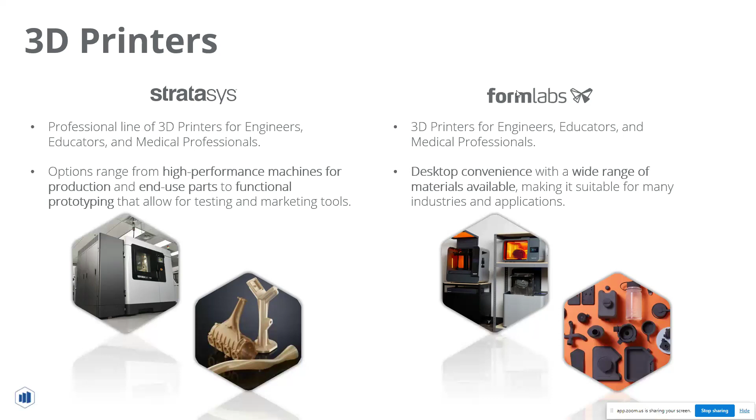And then we help, we print like 100 or 1,000 parts for them. Artec 3D scanners, we sell 3D scanners as well. So on one end, we're 3D printing, and on the other end, we're scanning physical objects in the real world.

Why would you want a 3D scan? Well, maybe you want to reverse engineer a part that you don't have a drawing for. Or maybe you want to inspect a part, to see if it's within the tolerances that the design intent or the design engineer intended.

So we have a few different scanners. We have the Artec 3D Leo, which is a lightweight and mobile scanner. You can use it anywhere. It has a hard drive and a battery built in. It stores the scan data inside, and then you can plug it into a computer and retrieve the scan data, work with it to reverse engineer the features, and then get it into SOLIDWORKS, where you can work with that model and change it, modify it, or 3D print it, whatever you want to do from there.

Then we have the GOM scanner, which are industrial 3D metrology scanners. That means they're very precise and they're used for inspection. So 3D scanners and 3D printers and software, we sell a lot of different things.

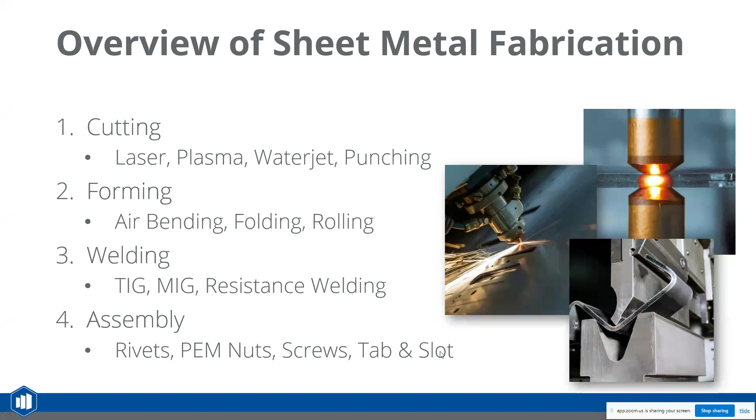So my personal experience, my background was as a product designer or mechanical designer. I worked in the sheet metal industry, and I primarily use two machines. One of them is on the left here, is a laser. It's the Mazak laser from Japan.

And then we have the Safan Darley press brake. This one is for the air bending of sheet metal components. These are the two machines that I mainly designed for and made CNC programs for. So I can speak to the background of these machines and the projects I've worked with and designed for.

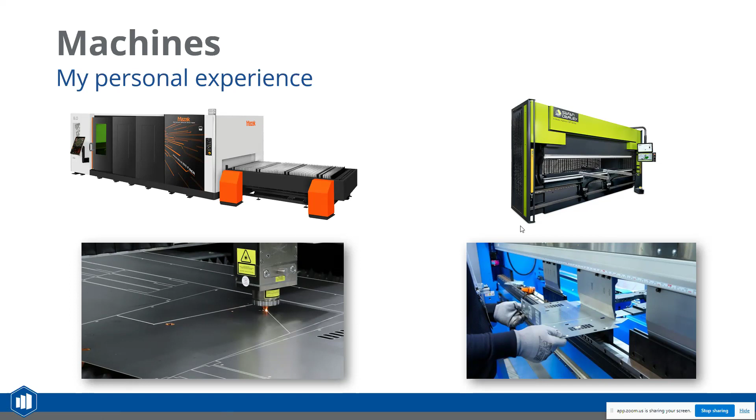Traditionally, when you think of sheet metal design, when I joined my previous company, most of our drawings were in 2D CAD. There was a 2D CAD file with the formed sheet metal and the flat pattern on the same drawing, and those two were disconnected.

They weren't parametric in any way. If I added a hole in the formed part, I would have to add it on each view and then also on the flat pattern.

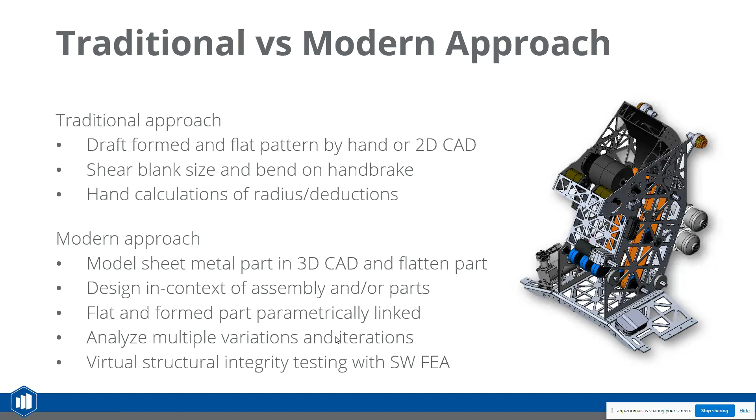So SOLIDWORKS and sheet metal design, what are the benefits? SOLIDWORKS has specialized tools for sheet metal design. We're going to see those in just a second. Flanges and bend deductions are done automatically.

Flat patterns, we can create those automatically. We can generate DXFs directly from the 3D model, a flat DXF. Those are the most useful for the cutting operation.

So that's nesting. We can also export our models to a CNC bending software. For the machine that I use, Safan, I would export the 3D model, and its software would recognize the bends, and then I could create the program for bending.

I could design the bending operation: this bend first, then this second, then this third bend. I could see where the tools on the machine would be, so every time I'm bending each bend, I can see whether or not my part is going to hit the tools or the machine, or if I need to make changes to accommodate the machine and tools that I'm using, because I want to be designing for the machine that I have.

Now, the benefits of sheet metal design in SolidWorks. Why would you want to design in 3D? Again, it's accuracy. We can create accurate parts. We can minimize the prototyping because we know how the part's going to look before we even design it.

We can optimize the material usage and reduce waste because we're going to be nesting, programming a bunch of different parts at the same time, which reduces material usage. We can simplify the CNC programming; it's very easy, you just drag and drop into your nesting software, and everything gets programmed pretty much automatically. Because of this, it's much faster to go from the design phase into the production phase.

Okay, so now that we've covered a little bit about Trimech and manufacturing processes in sheet metal, let's actually jump into SolidWorks and show you how to use the features to design this shelf. So this is a sheet metal shelf with a few different bends. It has holes, it has hemming, and I'll show you how that's done.

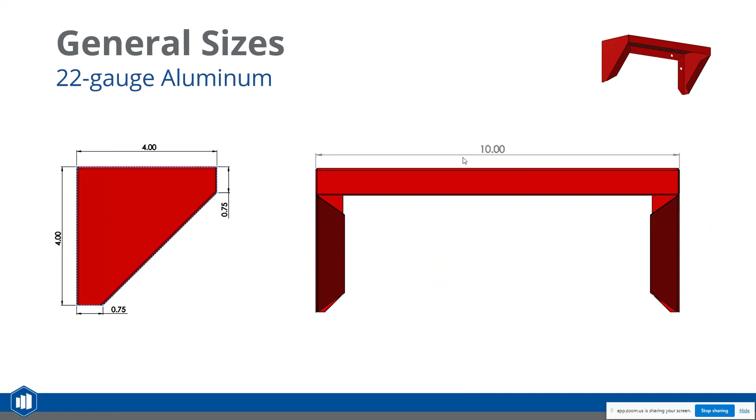This is the general size, and this is in inches, guys. So 10 inches is going to be about 25 centimeters. That's how wide this shelf is. It's going to be 22 gauge aluminum, so very thin. It's thin aluminum that we're going to be using.

We're going to be covering a few different sheet metal features that you can see here. I think the most important in the end is to get the flat pattern - that's ultimately the goal. Because this part is symmetrical, we're going to design one side of the part, and then mirror it over to leverage that symmetry.

And the process that we're going to use today is called convert to sheet metal. So I have a question - yes, go ahead. Sorry to disrupt, but I wanted to know, what do you mean by nesting?

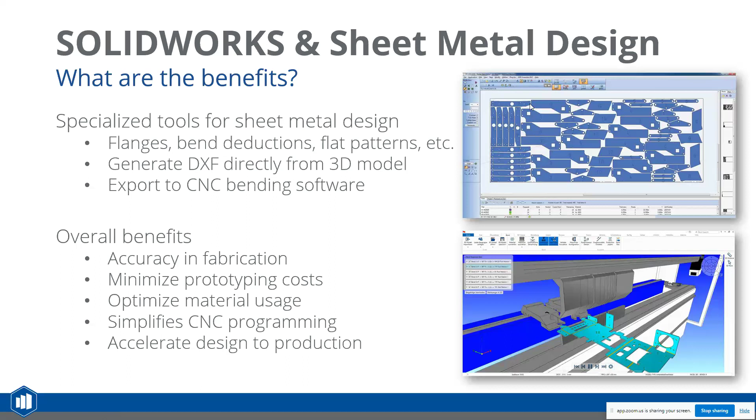And then you can say if your group of DXFs is a specific product and your purchase order is for 100, you can put a quantity of 100 and it'll multiply everything by 100. Okay, yeah, thank you. No worries, thanks for the question. Good question.

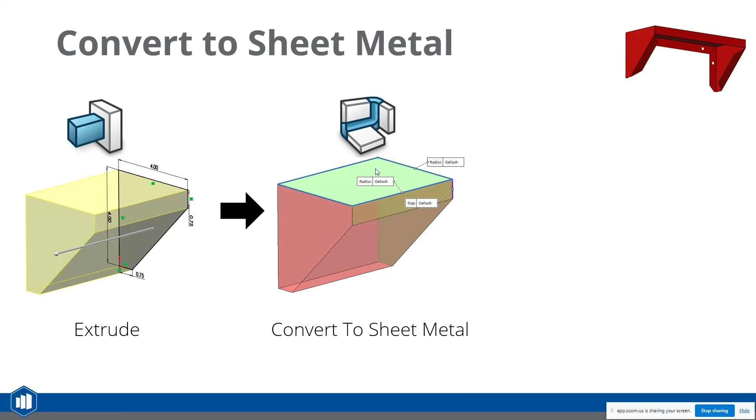So back to the sheet metal design, we're going to use convert to sheet metal today. That's one of the ways you can design sheet metal in SolidWorks. It starts off by creating a solid body - we're just going to extrude the sketch, and then use the convert to sheet metal feature, which allows us to pick faces and edges to define the sheet metal part. So we're going to end up with the sheet metal body on the right from an extrude, which is very useful. There's a time and place to use this feature, and today is a good example.

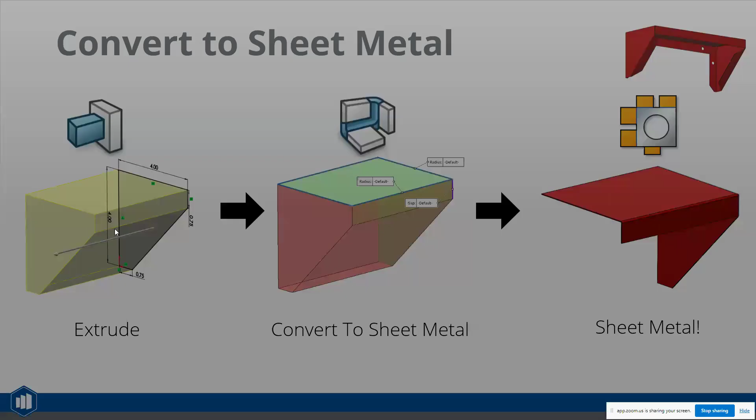So let's jump into SolidWorks.

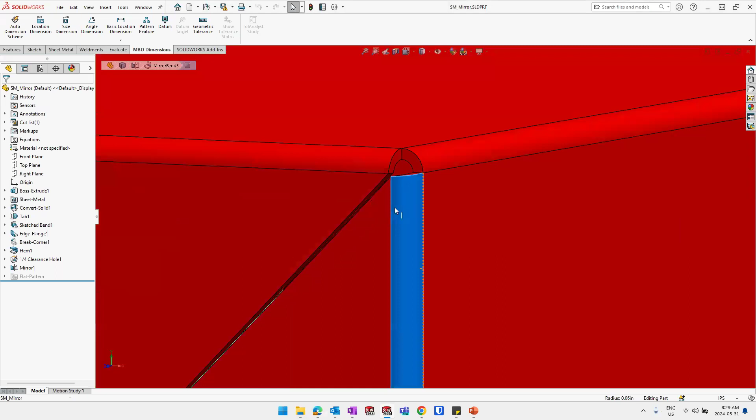Here is the finished part. We can see the sheet metal part here. You can see that SolidWorks has applied the different radii, so we have the radius here, and we have a gap. This would be very difficult to do without sheet metal features. You'd have to use surfacing, and it would take a long time.

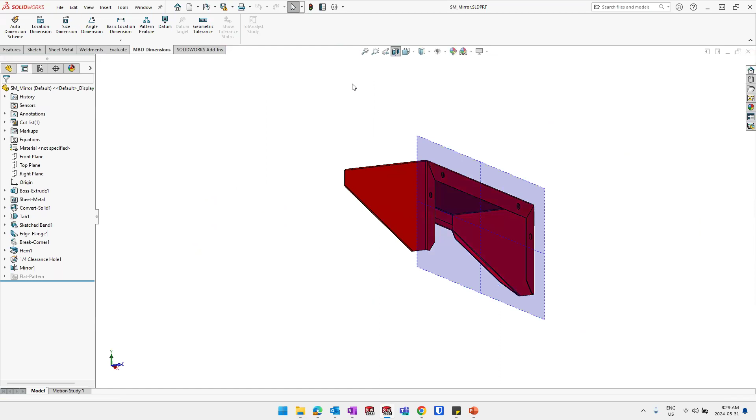You also have the hemming, the hem right here. You see the hem? The material is folded in on itself to create a stronger edge, so you have double the thickness in this area. This is a common process as well.

So the sheet metal tab is going to be here in SolidWorks. If you don't see it, you can right click here and find sheet metal, and you're going to see all of these different sheet metal tools. One of them is the flat pattern.

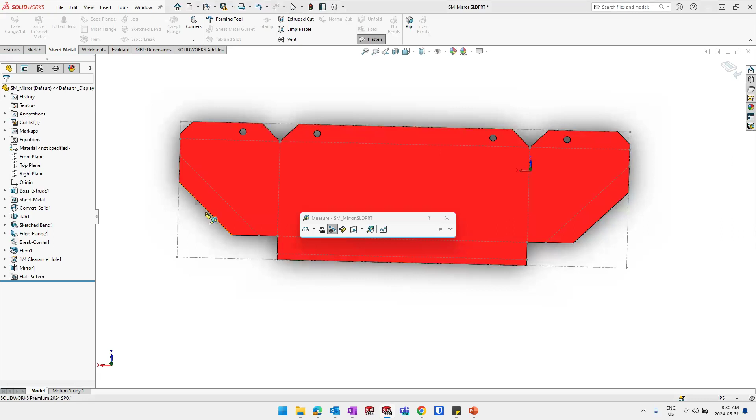This is just a different configuration of the part. One of them is the flat pattern, and we can toggle that just with the click of a button, and we have this flat sheet metal part. We can then measure the bounding box: 5.6, 11, or 17.9.

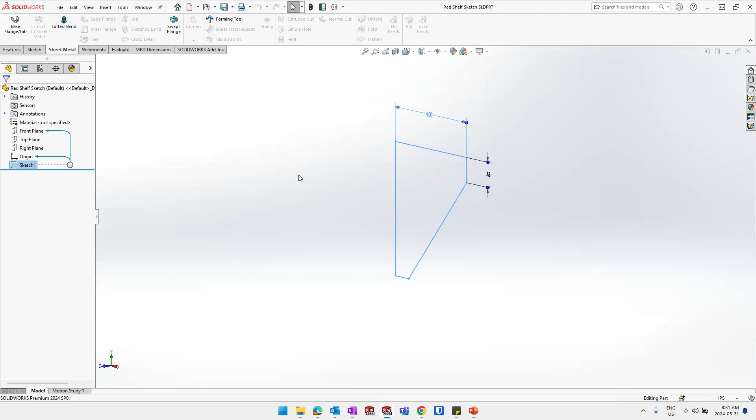So let's close this and let's start designing. Here's my sketch, and I'm going to extrude this sketch. Feel free to stop me whenever. I'm just going to do a simple extrude of 5 here. Okay, and we have a solid body.

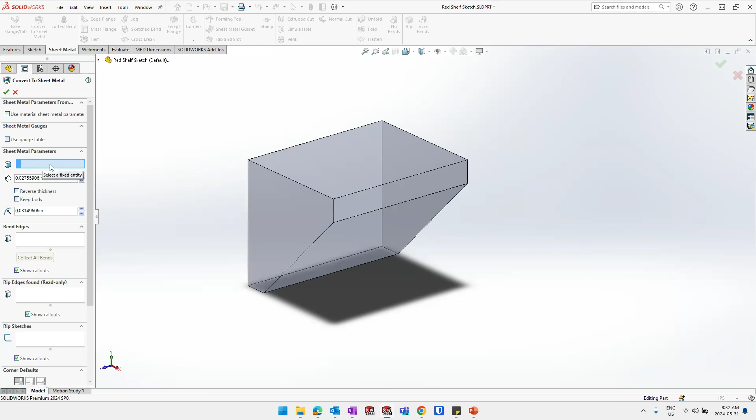Now, convert to sheet metal is the feature we're going to use. You can see the picture here - it's going to create a sheet metal body from a solid body. So let's see how that works. The first thing is a selection of a fixed entity, so it's looking for a face. We want to say that this face is our fixed face.

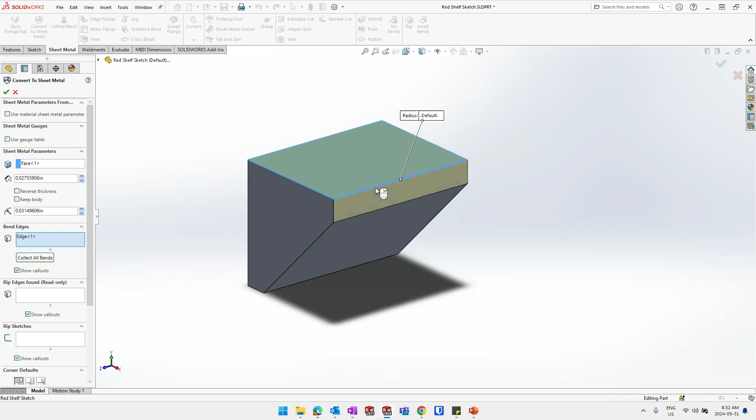And then what are the bend edges? You can do collect all bends, but we don't want to do that. We want to have some more control, so we're going to click this guy here and this guy here.

And we're going to use a gauge table, which is just a table of different thicknesses, so we can pick from different thicknesses. We're using 22 gauge today, so we're going to select 22 gauge, and we can start seeing that things are happening here.

The other thing that we want to control is the gap. This is the default gap for all gaps in our model here, so we're going to do 0.01. This isn't like an industry standard or anything like that, it's just what I'm doing right now. But you'd have to know what you can do in your manufacturing shop. I've done 0.5 before, I've done 0.1.

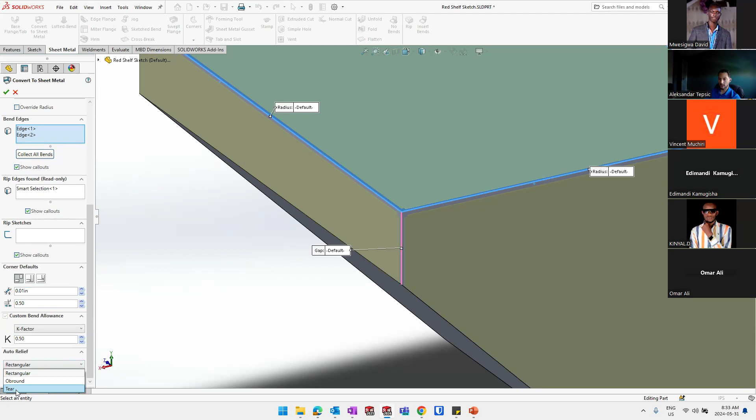So it really depends. We're going to do auto relief tear - I'm going to show you what that means in just a second, but for now let's do that. And we can also change the thickness, reverse. We can go on the outside of the sheet metal face, or we can say that the faces of the body are going to be flush to our sheet metal.

And then we can also choose the different radius of the sheet metal component. This is dictated by the tools that you're using to bend. So in my previous job, I knew for this thickness of material, I only have, for example, 2 different tools, and I know they can make these 2 radii, because I would bend it and measure it, and I would input that in here. So we're going to just go with 0.03.

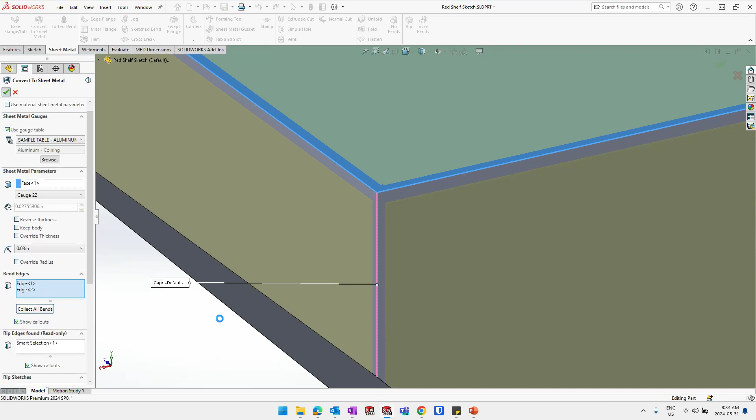We're going to click OK, and we've created our sheet metal body, which we can now flatten. So we can flatten it, but we're not done, so we're going to continue on here.

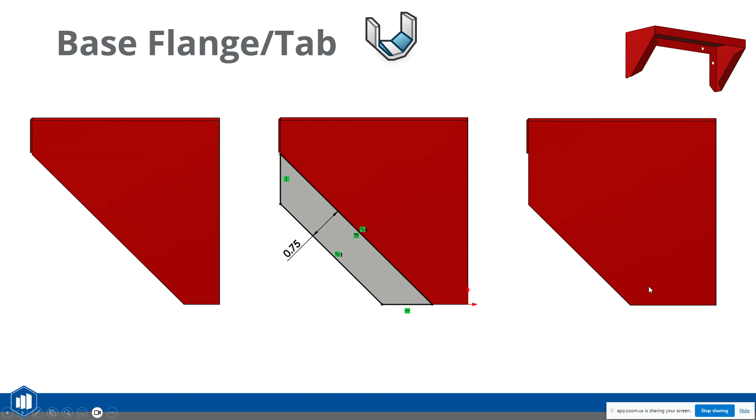Okay, so next we are going to add some material. That's a very common thing - we want to extend something, we want to add material in a certain area, and we can definitely do that. So you can see here, we're going from this to this. And then when we add that material, we're going to use something called the sketch bend - we're going to bend the sheet metal about a sketch line. So let's do that.

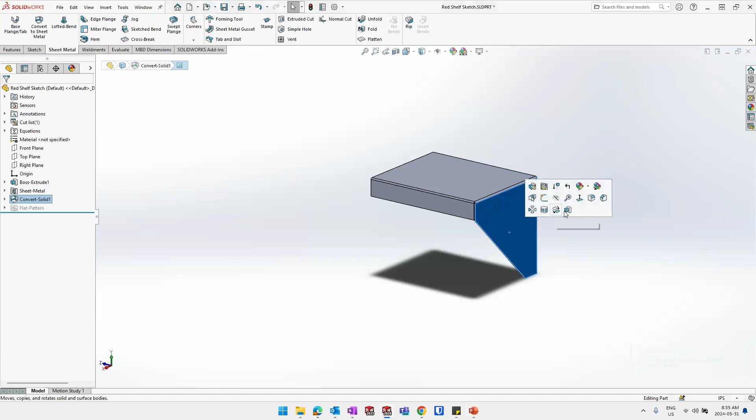Okay, I'm just going to do normal to. I'm going to sketch, and I'm going to use the S key to pull up my line tool.

So we have a closed sketch here, and we just need to define some dimensions. First, this line and this line, we need to make them parallel. And then we need to create this dimension. It's going to be 0.75 inches, so around 2 centimeters, for example. Once that's done, we can click OK.

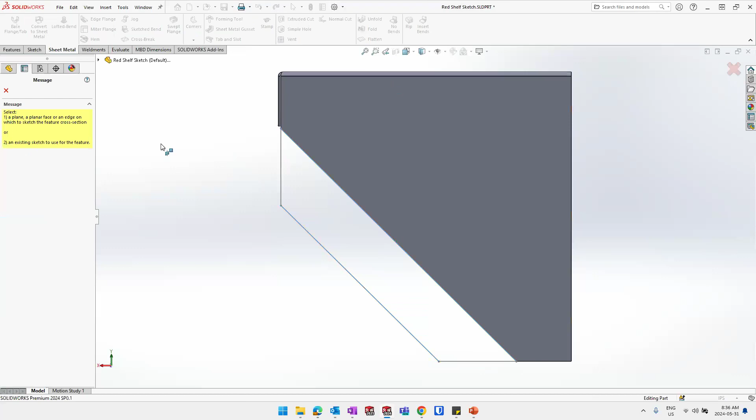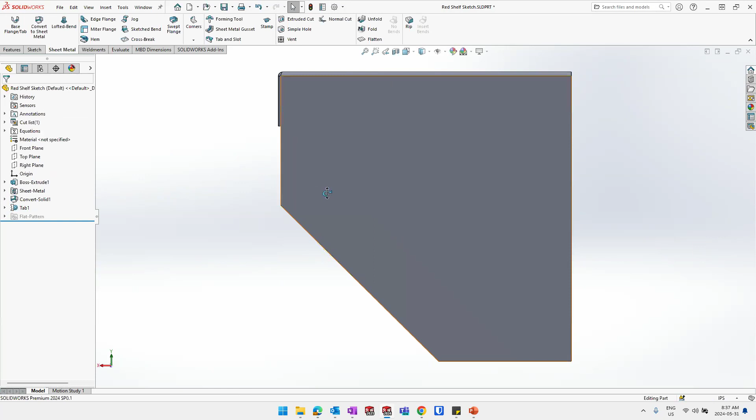Then base flange or tab, that's the feature we want to use. So if we click base flange or tab, click the sketch, it knows that we're adding to an existing sheet metal body. So it's filling this information for us, like the gauge and thickness. And we're going to merge that result. Once we click OK, we don't see any edges here because it's merged those two bodies.

And that feature is now in our tree here, right? We can always go back to it. Just going to turn this off. So our feature is here, right? Now...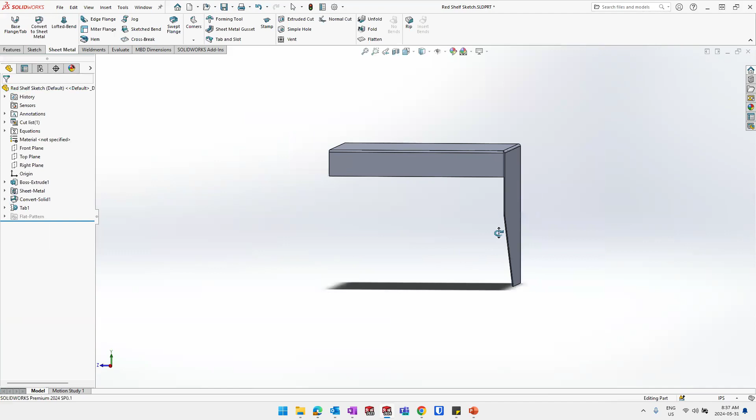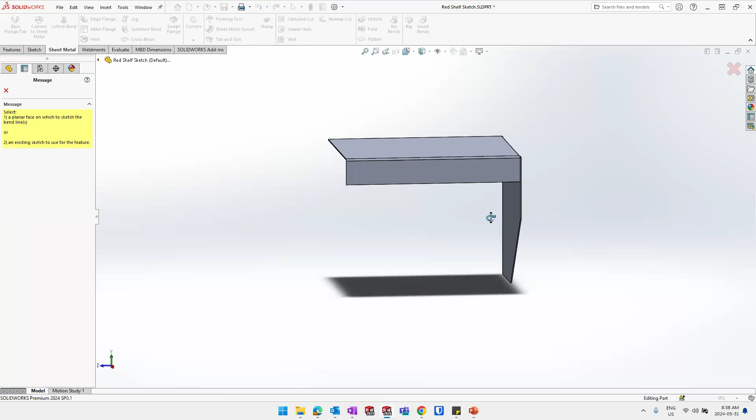We want to make that bend here. So first we need to activate the sketched bend feature. So sketch bend, and it's asking us to create a sketch or use an existing sketch. So we're going to say this face here, and then we can just stay in this view, select the line, draw the line. Again, we're going to say it's parallel.

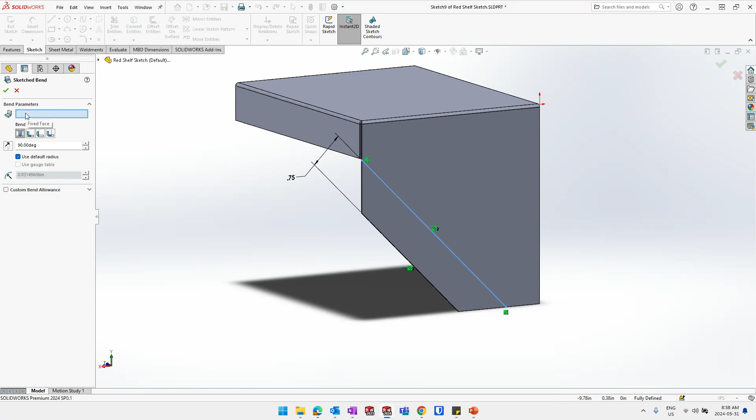Make parallel. And again, we're going to do 0.75. We're going to click OK. And now we're right away in the sketch bend feature. And we need to select a fixed face, so which face is not being bent, basically.

So this guy here. And then we can see a preview. It's bending the wrong way, but that's fine, we can just click reverse. We can specify some different options here, like are we bending on the center line of that line, or are we bending material inside or material outside, or do we want that bend to start where the radius starts? But what's the angle? Are we using a default radius, etc., etc.?

So there's some options here. So let's confirm that. Well, 90.

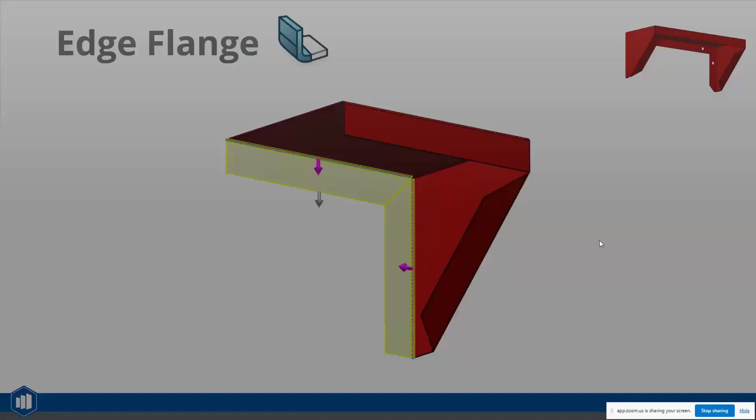Any questions so far? Okay, let me know if I'm going too fast, too slow. This is for you guys.

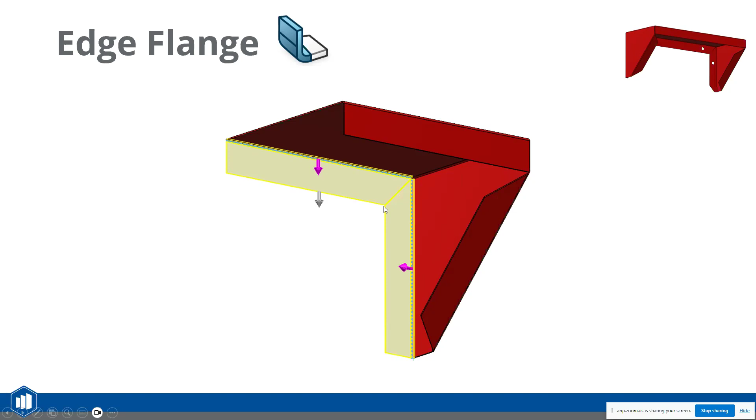So the next step is to add the flanges on the back here, right? And the interesting part of it is how do we get this? How do we get the two bends to meet at a specific angle, right? So let's see how that's done.

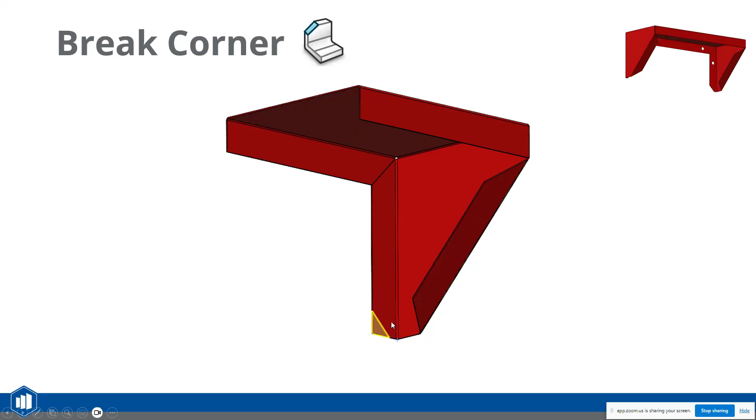And then we're also going to use break corner. I've used these in my previous job to remove the sharp corners, just because I didn't want people to cut themselves in production, or the customer to cut themselves. So I would round the corner, or I would just chop it off at a 45-degree, just like this. And then we're going to do the hem operation as well. I'll show you how that's done.

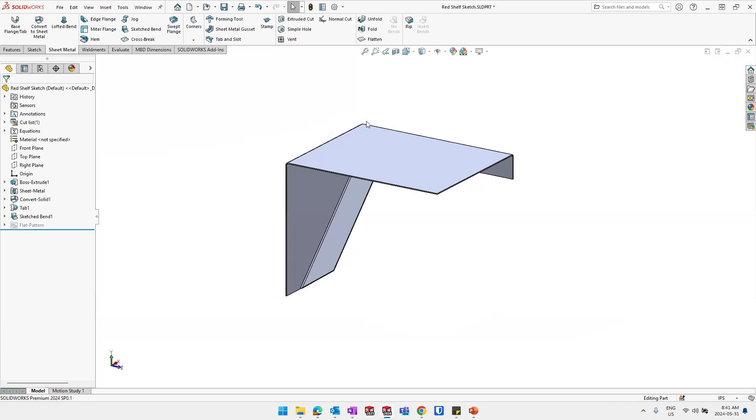Okay, edge flange. I like this being white, you don't need a shadow. Okay, edge flange.

We're going to click an edge, and you can drag this flange, or you can input a specific length here. I believe we're going to input 0.75 again. 0.75.

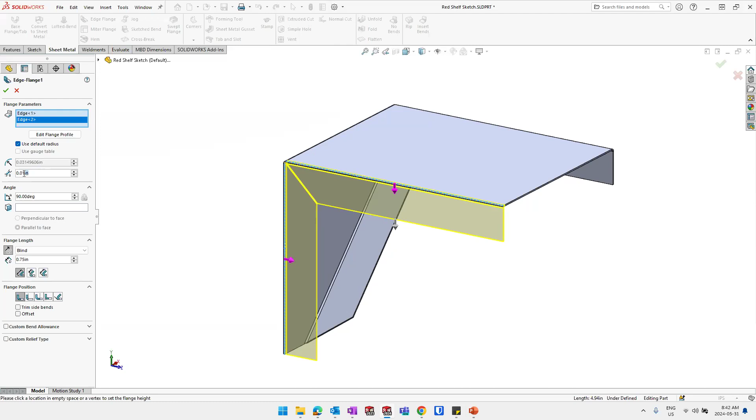But how do we get the second edge? Well, we can just click here again and select the second edge, and SOLIDWORKS is automatically going to put the cut here. We don't have to do any trimming, it's going to do that for us, right? We can choose the gap distance, that's the gap distance between these two guys right here.

So if I go 0.2, you can see it's much more. 0.1, 0.01 is what I'm going to do. Angle, flange length, it's blind, but you can do up to vertex. So if you are modeling and you have a vertex that you want to go up to, you can choose that instead of a fixed distance.

These options down here are different ways of defining the flange length. Typically, outer virtual sharp is the one to go with, because that's the one that you can measure, like with a tape measure or with a caliper. So this one always made the most sense to me, but I'm sure there's applications for these guys as well.

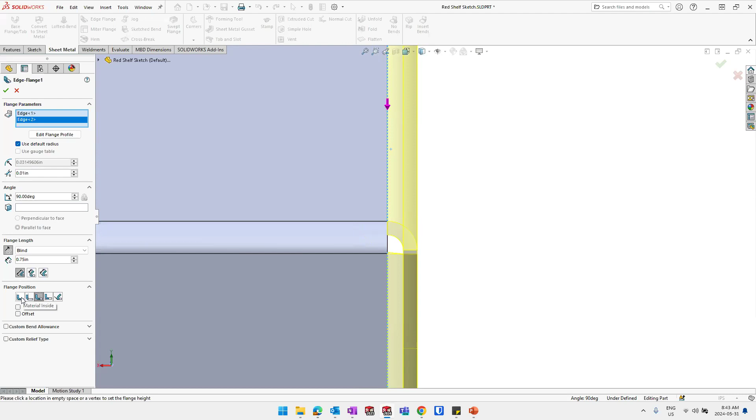Flange position. So if I go to this view, material inside means that the flange face is going to finish where this edge is. But if I go bend outside, you see what's happening to the flange? It's coming out from that edge. So depending on your design intent, you want to make sure that you choose the correct flange position. Most of the time I did material inside, just because I knew where my flange face would end, right? Any questions on the flange properties? Or does that make sense so far?

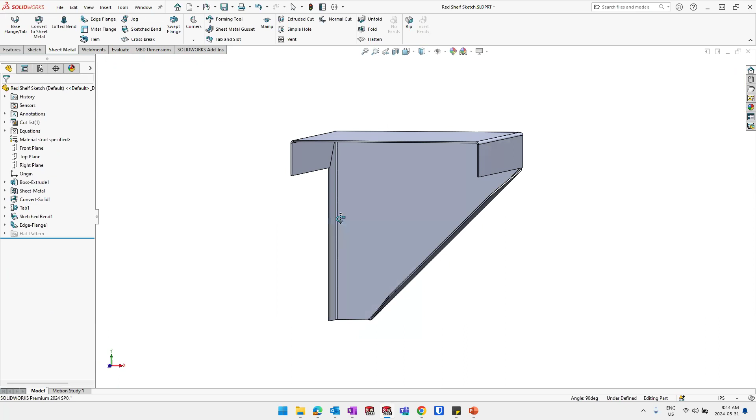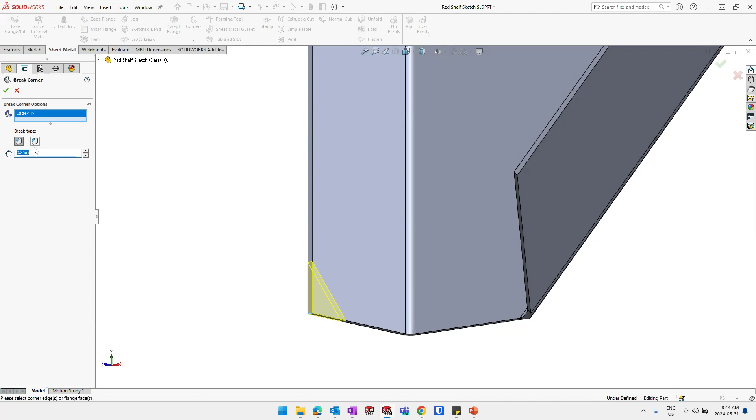So let's break the corner. Break corner is a simple feature. You can either do a chamfer or a radius, and all we need is an edge. So we remove that sharp corner.

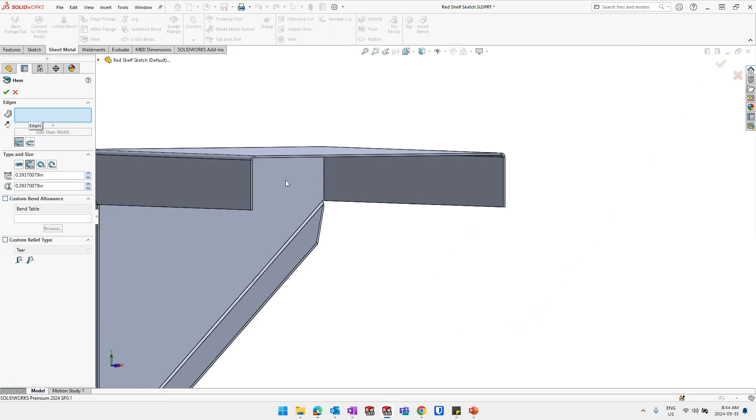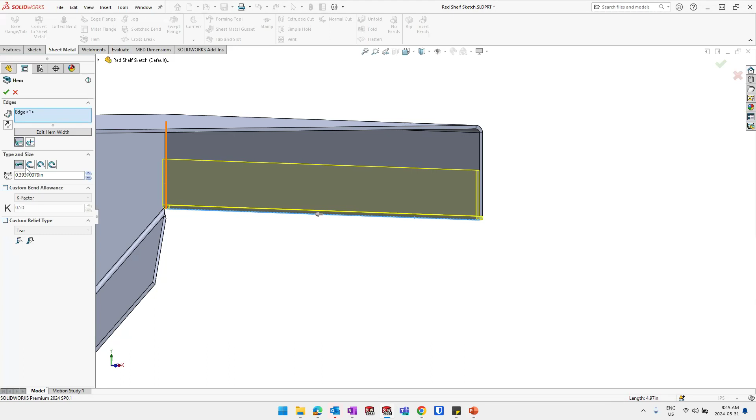Hemming. For hem, we need an edge. There's different types of hems, depending on the machine that you have. A lot of these options are machine dependent. But I've used the closed hem, which basically crushes the sheet metal into two layers with pretty much no gap in between, right? That's what we want. We're going to do 0.25.

Okay, so we're getting there, and we're showing you guys a bunch of different features. The tear, right? So what's happening here, this might look a little bit weird. In the real world it's not going to look like this, but the material is going to want to tear because of that bending operation. This radius here and this radius here, there's going to be some material that's kind of deforming plastically in that region.

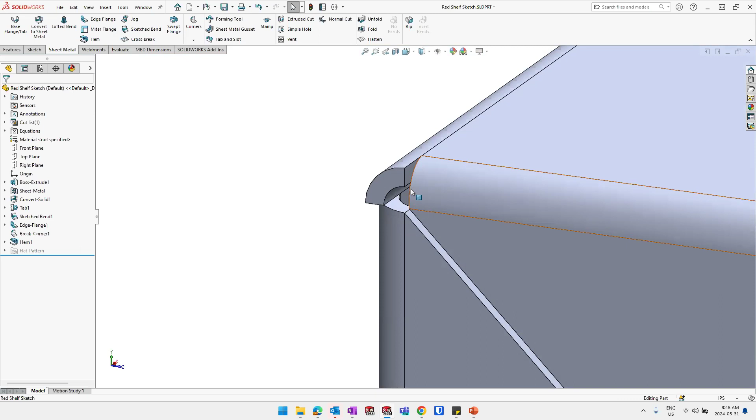You could, if you wanted to get rid of this, add a corner relief - this is not part of the presentation, but I'm going to show you what that means in just a second. So we're going to get corner relief on a three bend corner, and that's this guy here.

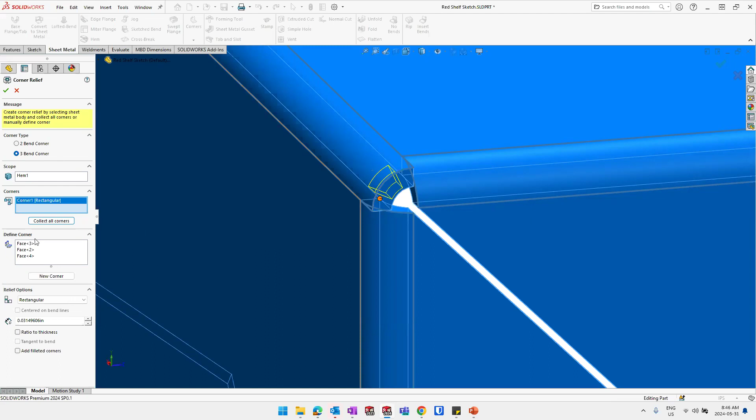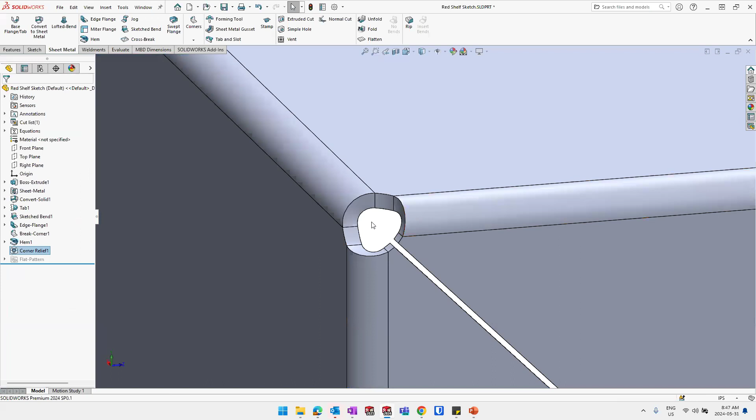And we can change the way this looks here, right? So we can add a relief in this area so that there's no deformation of material in the corner. So typically this is a good practice unless you want the corner to be closed.

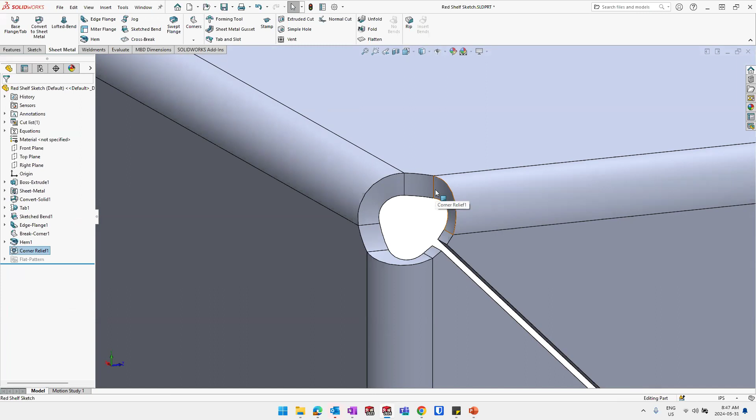I designed sheet metal enclosures where there was airflow going through, and so the corners needed to be tight to reduce the losses of pressure. So, but typically, if it's a structural component like this shelf, maybe you might want to put a relief in there, just like that. Any questions so far?

Okay, next we're going to use the hole wizard to define some holes. And then we're going to mirror that body to leverage the symmetry. Okay, hole wizard.

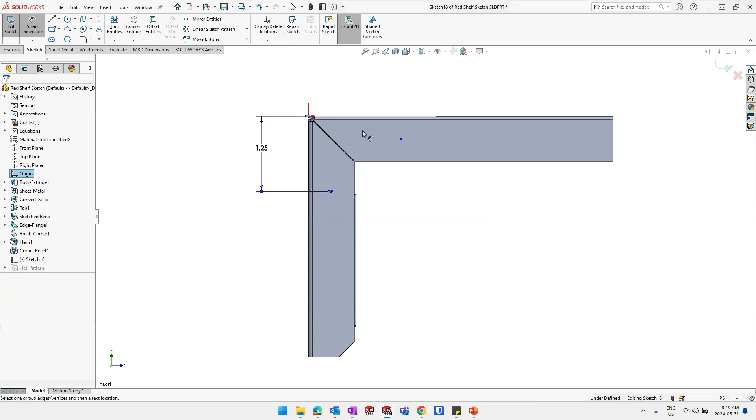Sorry, is there a question coming through? Because the audio is choppy. I'm struggling to hear the question.

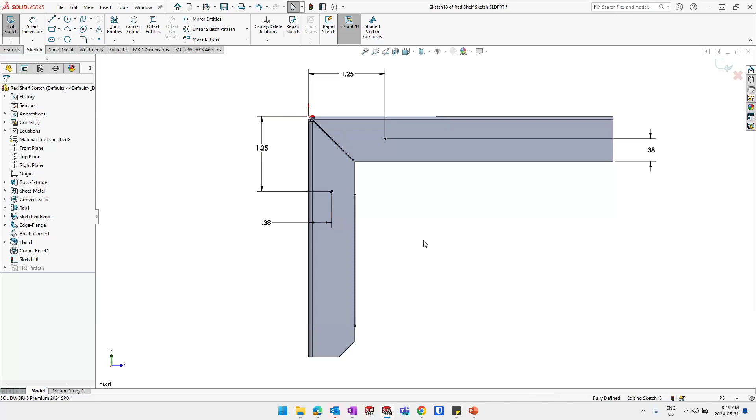So I've defined two points here where I'm going to add the hole using the hole wizard. And so I just input 0.75 divided by 2. We let SOLIDWORKS do the math, less work for us. So this is just right in the middle of that flange. We're going to add the two points.

And so now if we go, we have to exit sketch, hole wizard. I don't know if you guys have ever used the hole wizard. If you use it, that's great. If you don't use it, this is basically your machinist's handbook in SOLIDWORKS. So you can define the type of hole. Today we're going to use just a straight basic hole. You could do that with a cut extrude, but there are some benefits to using the hole wizard.

Like having access to different standards - inch, metric. I'm not sure what you guys use in Uganda, but you can pick a standard and then select what type of hole it is. So in our case, it's a screw clearance hole. And then we can just say 1/4 of an inch is the nominal size. And we can tell it whether that's a close, a normal, or a loose fit.

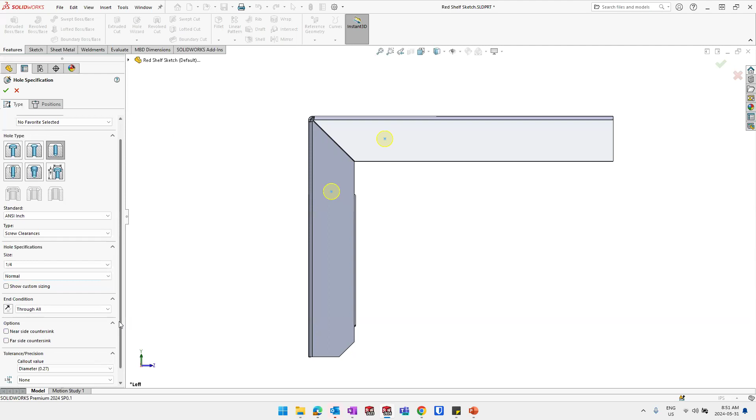And then it's going to size that hole based on these options. So we're going to say normal. End condition is through all. We can add countersinks near or far, etc. And then SOLIDWORKS picked up that sketch, so the points are already there.

The cool thing is that in the feature tree, you can see '1/4 inch clearance hole.' If you just did a cut extrude, it would just say cut extrude 5, which doesn't really give us much information at a glance when somebody's looking at this.

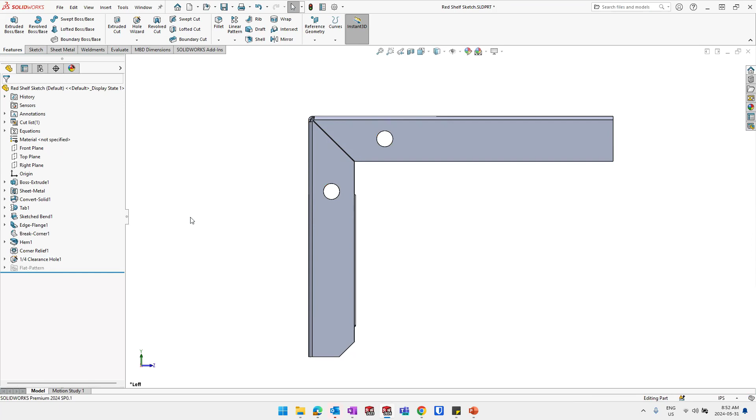It's much easier to understand what that is. And when you measure this hole, you're going to see 0.27. So 1/4 inch is 0.25, but because we said it's a screw clearance hole with a normal fit, SOLIDWORKS is adding the 0.02 for clearance on its own, using that from its database, which is why I say it's like a machinist's handbook.

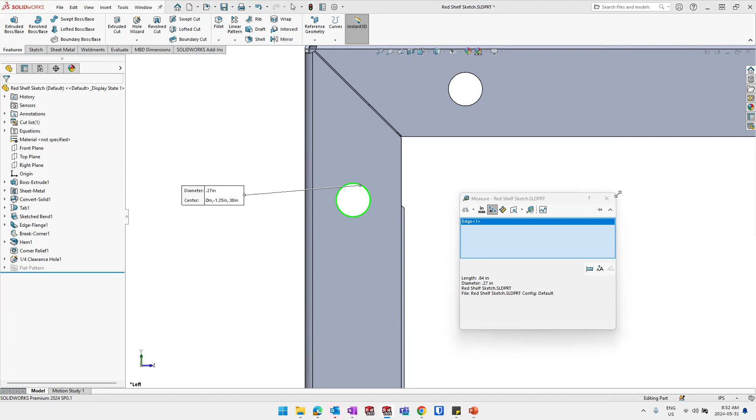So if you're not using that, I highly recommend it. Actually, we don't want to go through all — we want to go back here. That's funny, we don't want to do through all, we want to go up to next.

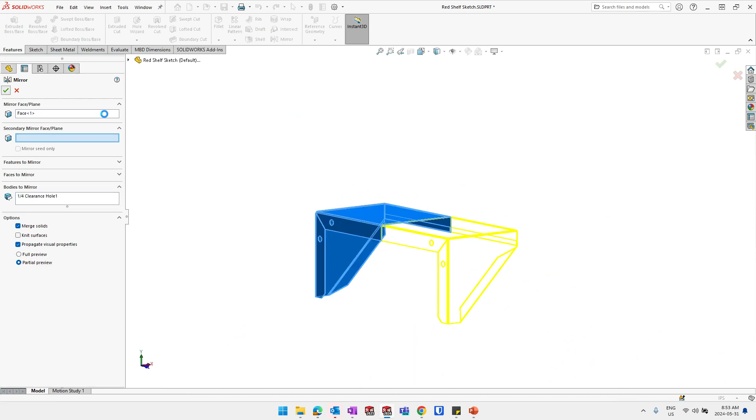And mirror bodies — we're going to use mirror bodies to mirror this body. We're going to select the mirror face, this face here, right? And there you go, the sheet metal component is done.

We can flatten it, right? We can create a drawing of this. So let's create a drawing.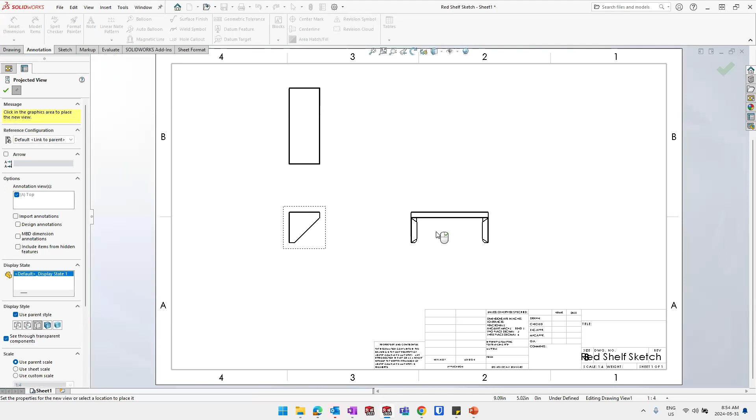Trying to change the scale. Okay, there we go. So there's our drawing.

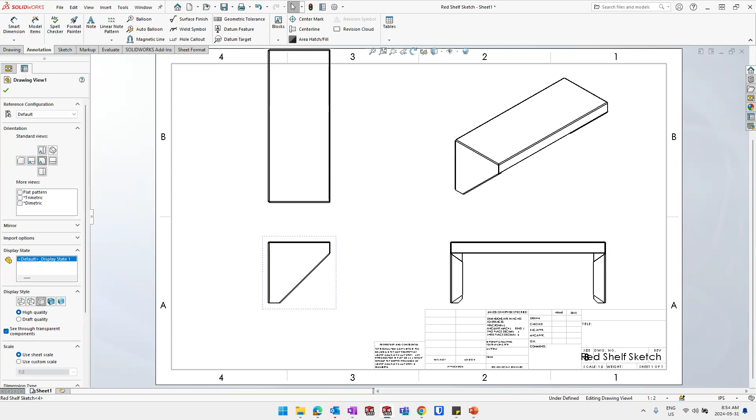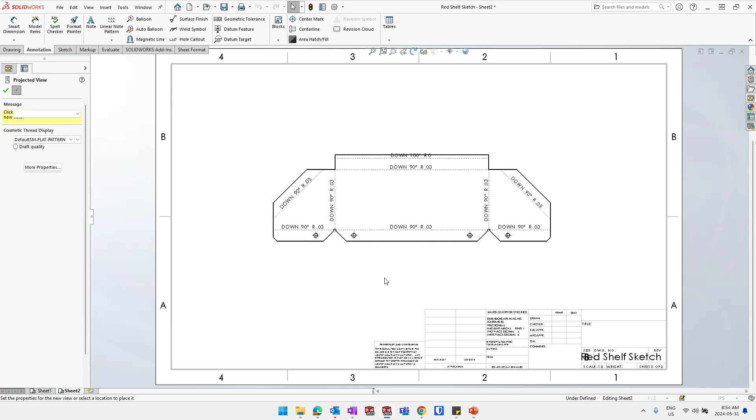Now, typically what we used to do was on the second sheet, we would go here and insert the flat pattern. There's some bend notes here, like this one's going down, this one's going down 180 — that's the hem. So we have some bend notes here, and we have bend lines.

What we did was write a note here, 'flat pattern,' just like that. And we would also provide overall dimensions, just for reference.

Now, what else can we do here? Well, you know what, I don't like this at 1/2, let's make it 1/3. And we're going to move this.

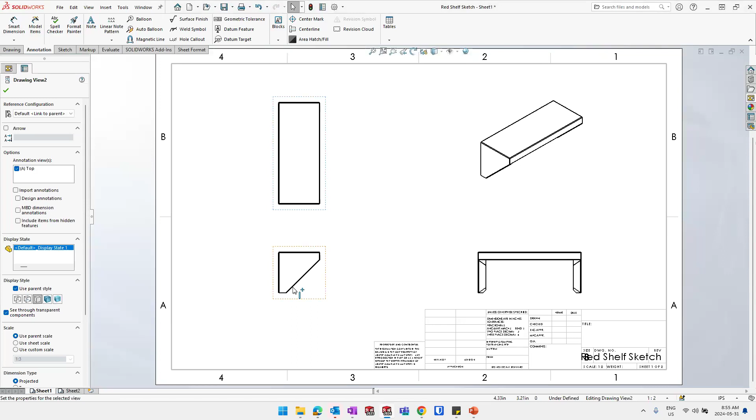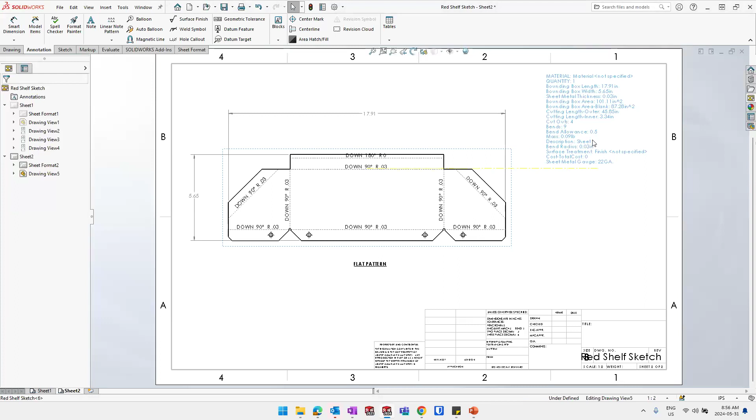What we can also do is if we right click, go to annotations, cut list properties, we can get this list of properties. There's a lot of information here.

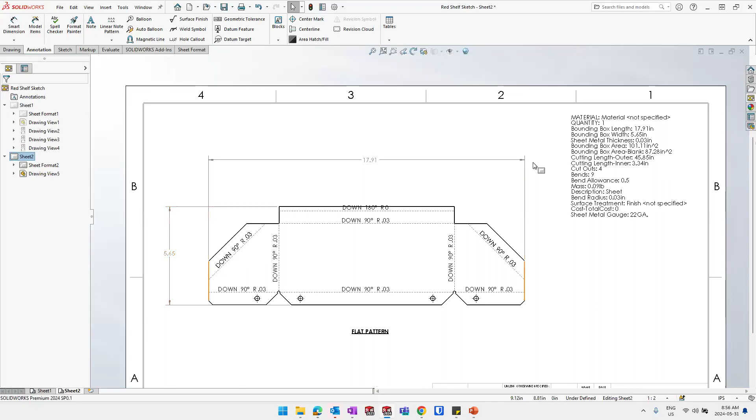Material — if I specified a material, it would be here — the quantity, bounding box, length, and width. So it's telling us how big the flat pattern is, which corresponds to these two dimensions. The bounding box, the sheet metal thickness — that's all in the drawing. Plus the area, and the blank area.

These are really good for estimating the cost. Like our purchasing department would want to know the estimated cost of this part, and knowing how much material goes into it helps them figure that out. There are 9 bends, which is also very important for cost, because each bend takes up time on the machine. So we'd figure out how much time on the machine each part would take, and from there know the bending cost, and so on.

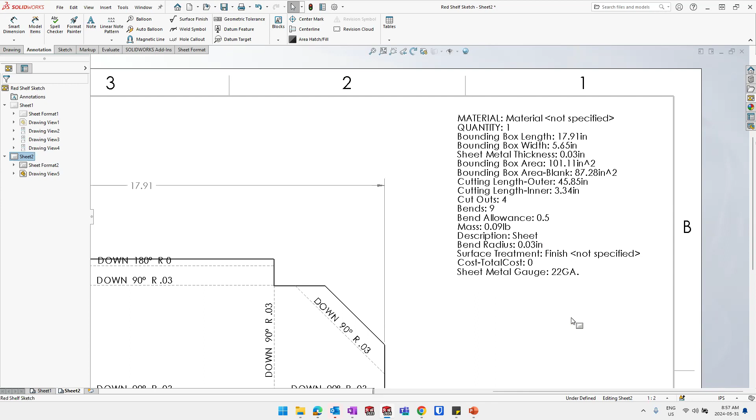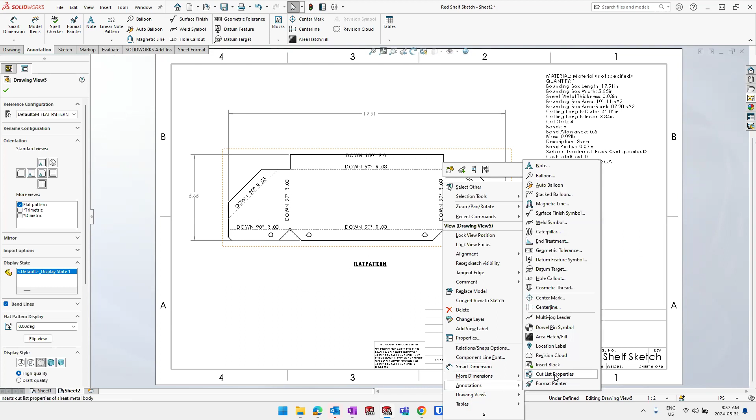22 gauge — so what we selected from the gauge table is showing up here. We have a lot of custom properties that we can get from our sheet metal part, which we would not be able to get if we were just modeling without using sheet metal. There's a lot of different information you can get from here — just right click, annotations, cut list properties. That's how you insert this note here.

What else did I want to show with the drawing? I think that's it, guys. When we go back to the part and make any changes to the model, everything gets updated, right? We just extended the length, and when we come back here, everything gets extended — our flat pattern gets extended, and our notes update.

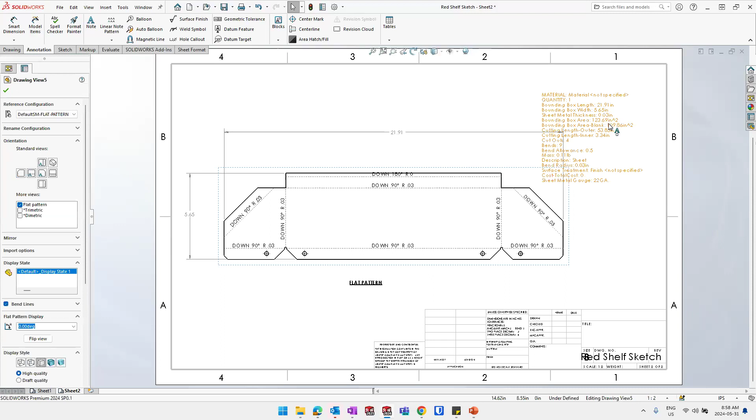So you can see the benefit of using sheet metal with SOLIDWORKS as opposed to AutoCAD or whatever else you're using. Sheet metal features are amazing.

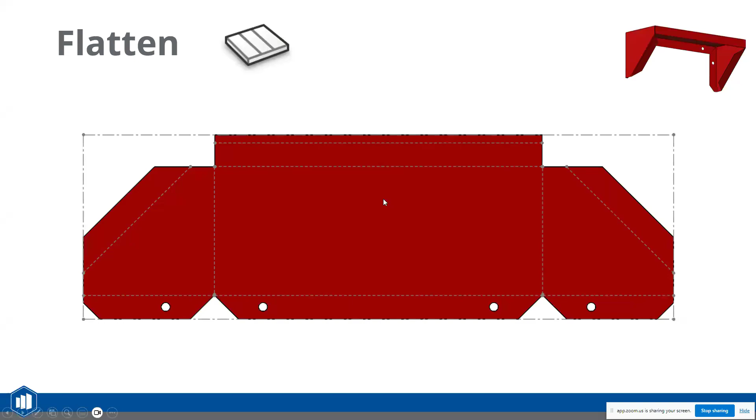So that pretty much finishes my presentation here. We've done all these operations. There are a few other sheet metal features we didn't go over, but these are pretty much the main ones you'll be using. This component can be designed in a different way.

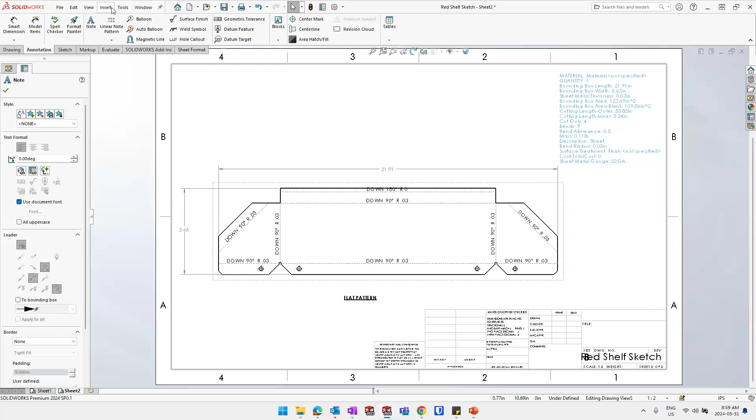You don't have to do the convert to sheet metal — you can model each face. So I could have started with this face here, then built out this flange, then built out this one, and then this one. You could do that if you want as well, but the convert to sheet metal is also a good option.